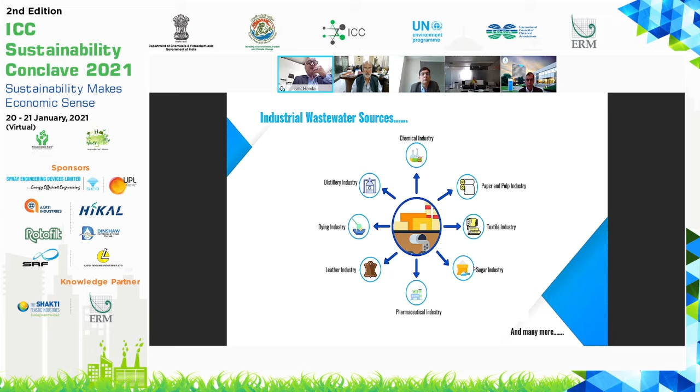There are many sources of industrial wastewater: distillery, chemical, paper, textile, sugar. They are the water guzzlers, they consume a lot of water and discharge a lot of water. When we are talking about such a high level of water consumption, discharging this water to water bodies is not good. We need to make it happen back to the industry, to make sure the industry reuses the water, because by the grace of God, water is the only element for us which can be used and reused infinite times. So we have to use and reuse water and let our water bodies become a natural source of water.

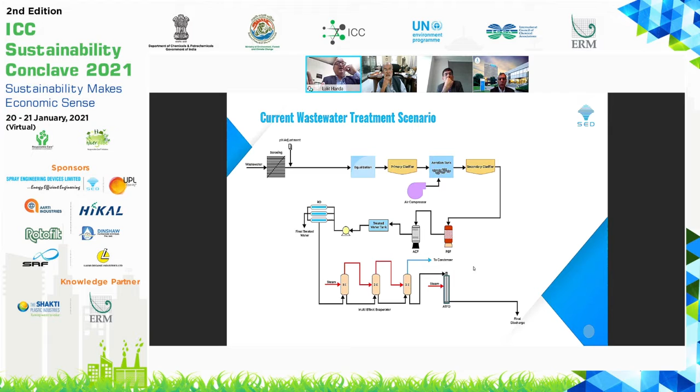We are talking about low temperature evaporation. Water is continuously evaporating from the earth—this is the first process that existed when the earth was formed. Water was continuously evaporating, and water boils at 100 degrees, but there is no evaporation happening at 100 degrees from the earth naturally. The maximum temperature on earth is around 50 degrees, so the maximum natural evaporation temperature is 50 degrees, whereas water boils at 100 degrees.

So we thought about this natural process already available to us—why not try to evaporate water at 60 degrees? Going into the chemistry and thermodynamics, we noted that water which boils at 100 degrees at atmospheric pressure can evaporate at 20 kPa of vacuum at 60 degrees. So we evolved a quite energy-efficient process to evaporate water at 60 degrees, so that energy consumption can be controlled.

In the next slides you can see there is no need for a heat source continuously running the process.

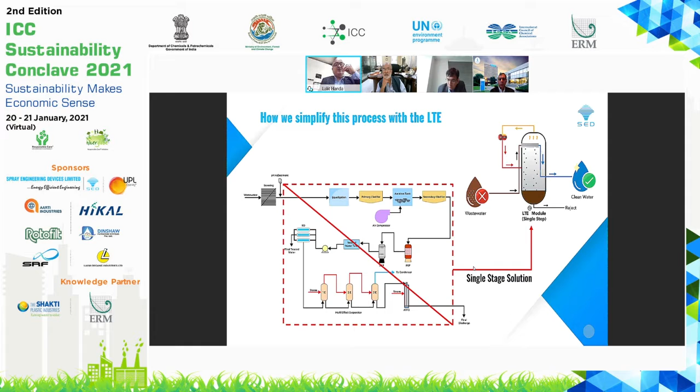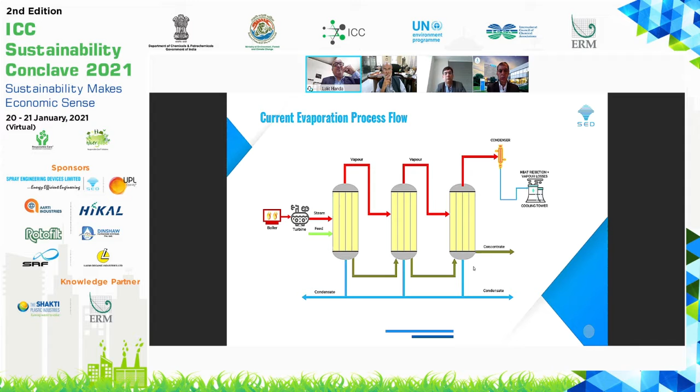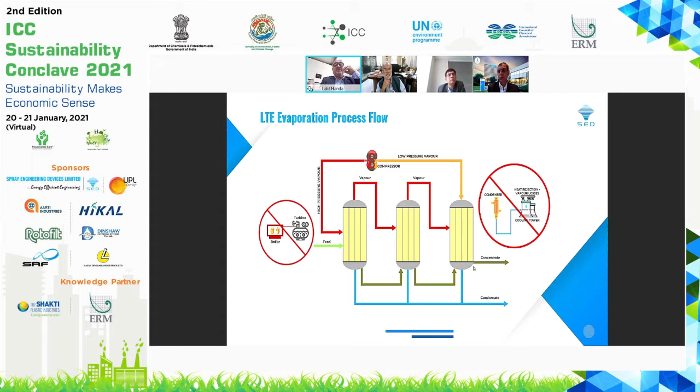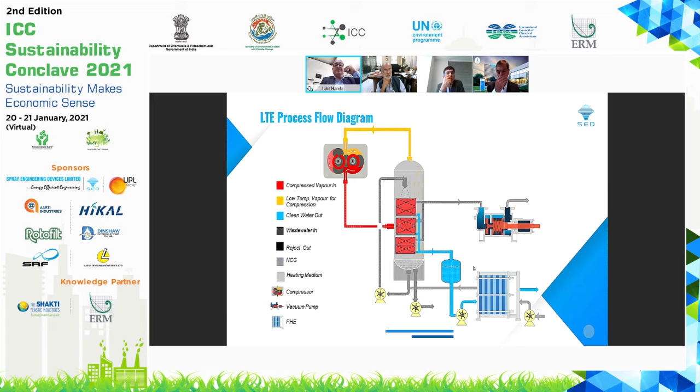This also improves the plant, machinery, and the whole pipeline, since we are no longer using fresh water—it's distillate water going back into the pipelines of the industry or factory. This improves the life cycle of the equipment that consumes water to process their end products.

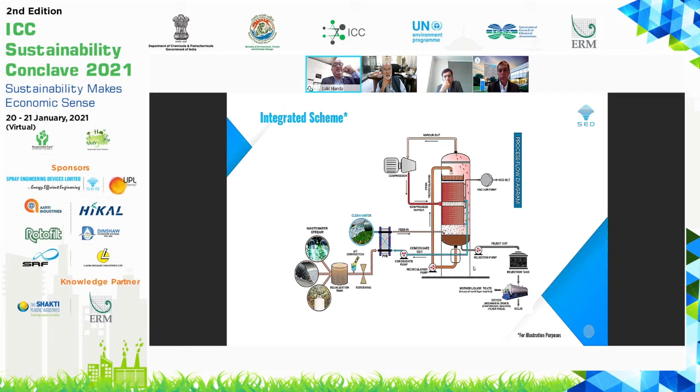It is a fully automatic intelligent machine, and all machines are fully controlled from the back end from our control room. We control and optimize the process as per the requirement at the customer place. So this is purely an automatic intelligent machine.

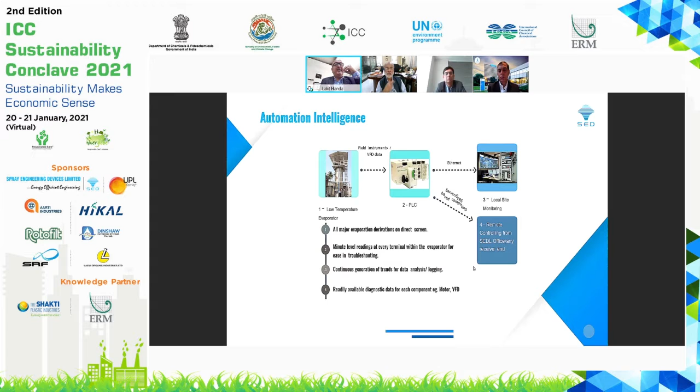It is an extremely efficient vapor recompression technology that is used, wherein the delta T for the heat exchange starts from 1 degree and generally ends at around 6 to 7 degrees. So you can understand that this is a highly efficient equipment which gives a good output from the energy point of view.

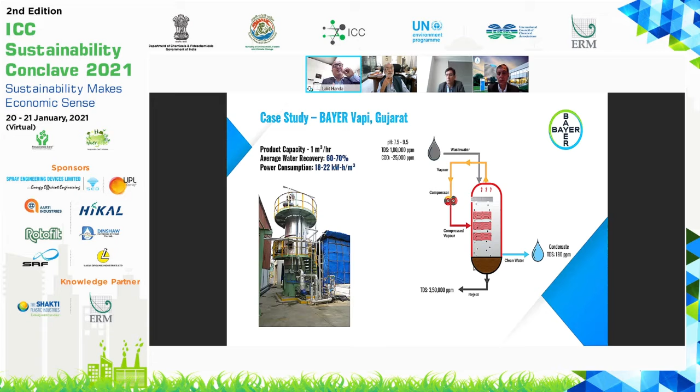Another case is in Vapi, at Supreet Chemicals. This is again a dye-stuff manufacturer where the water recovery is around 80%, and this water is being consumed by them for their cooling water requirements. And this plant has been running continuously for more than a year now.

So you can see the TDS of around 152,000 ppm coming out as 120 ppm. So it is a single stroke. There is no chemical, there is no in-built process, it's directly an evaporation process to evaporate the water and take the distillate out.

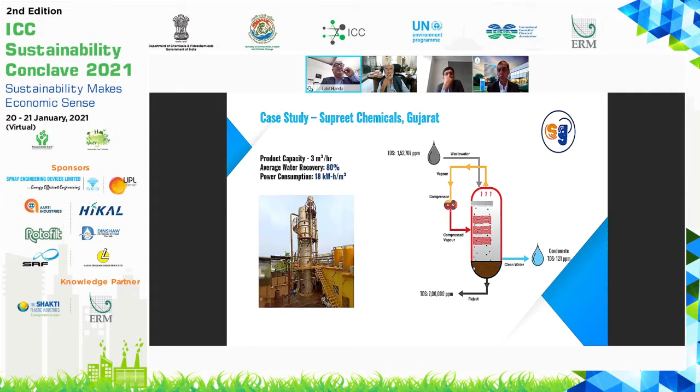This is the most chronic problem of the world, the distilleries. Distilleries discharge a lot of spent wash, and we have supplied equipment of around 300 cubic meters, which is already commissioned in Kenya, and they are able to continuously pass their daily production of around 220 cubic meters of spent wash through this evaporator, and they are not passing it to the lagoons.

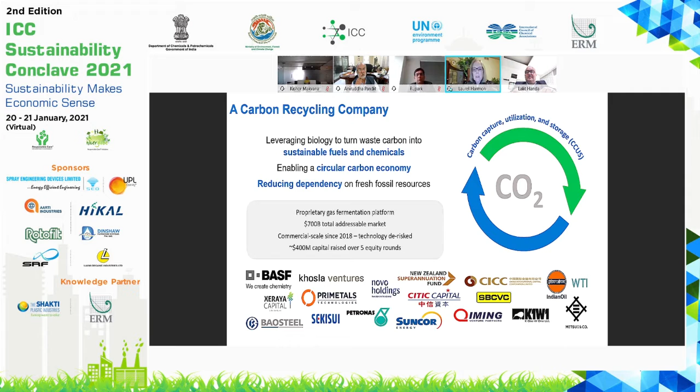As a company, in thinking about sustainability and our goals, we look to biology as the best way to harness carbon, to access carbon wherever it may arise. Biological systems can do things that we cannot emulate in man-made technologies or chemistries. A couple of really important things we, in a way, take for granted: one is the ability to replicate themselves. In effect, you've got a machine, a substance, a catalyst that's continually reproducing for you, as opposed to needing to be manufactured. And they are programmable.

Now we turn to biology that is ancient. The earliest forms of life actually originated in an atmosphere that was highly reduced, very rich in carbon monoxide, carbon dioxide, as well as other gases like methane and hydrogen.

Coincidentally, that's also the type of atmosphere produced from industrial processes today in the form of emissions. So when the company was founded in 2005, it set out to look for those life forms, those organisms that originated in that ancient atmosphere long before oxygen showed up on Earth, and to harness their metabolic pathways as chemical manufacturing systems.

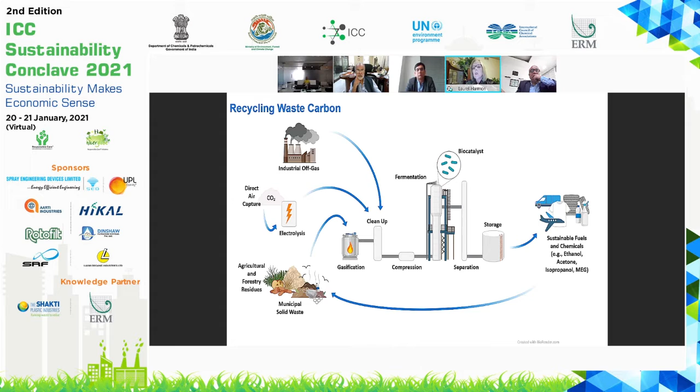And then to close the loop, if we think about non-recyclable materials, those which cannot be physically recycled, that have been made out of this waste carbon, because of the ability to use gasified waste, they can all be turned back into raw material for this process. So in that way, it's fully closing that carbon cycle.

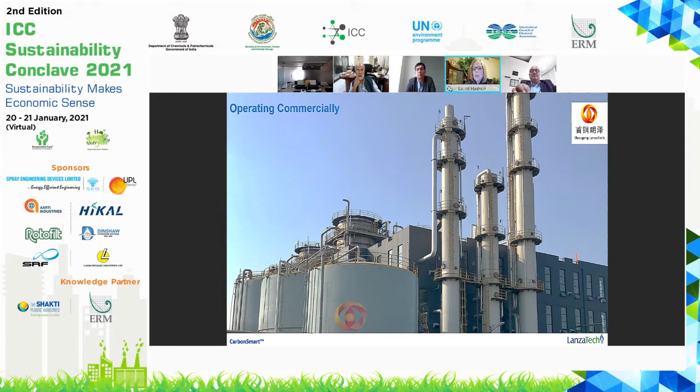So this is not science fiction. Our first commercial plant is operating in China at commercial scale. To date, it's produced over 20 million gallons of ethanol, which is our first commercial product.

And this is being produced from the off-gases of steel manufacturing. So this plant you're looking at is sitting right at a steel mill, being fed steel mill off-gas, going through that gas fermentation process and producing ethanol.

And in doing so, that quantity of ethanol product is equivalent to over 100,000 tons of CO2 being prevented from emission into the atmosphere. So another way to look at a process like this is as carbon capture and utilization.

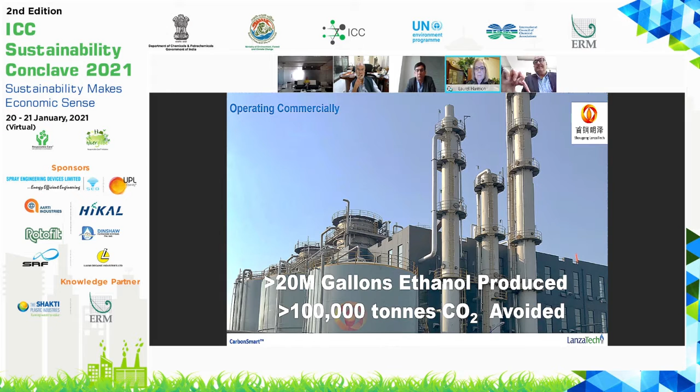Another strength of biology is its tremendous robustness. And for those who are more familiar with thermocatalytic systems, you'll appreciate how different biology can be.

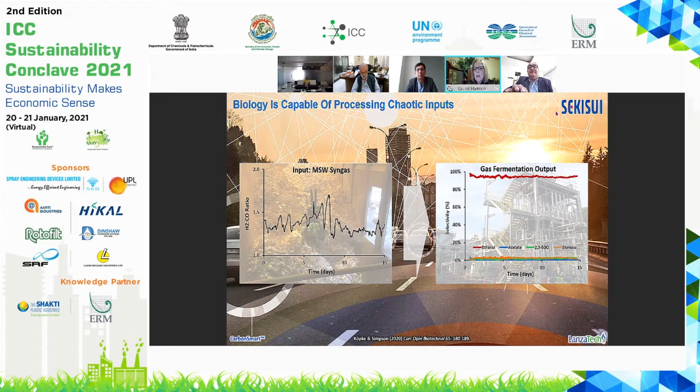What you see here is the operation of gas fermentation during that period. What's happening is that because we're using the intrinsic metabolic pathways within the organism, it adapts in the same way that our organisms ourselves adapt as we vary our diets. And so it is very robust to fluctuations and to contaminants as well.

And that is a real world example, and it comes from the system that you see here, in which we have been operating since 2014 this fermentation system, the same as is implemented at the steel mill, but in this case operating on syngas produced from unsorted, unrecyclable municipal waste. This is a pilot facility in Japan that is now being scaled up.

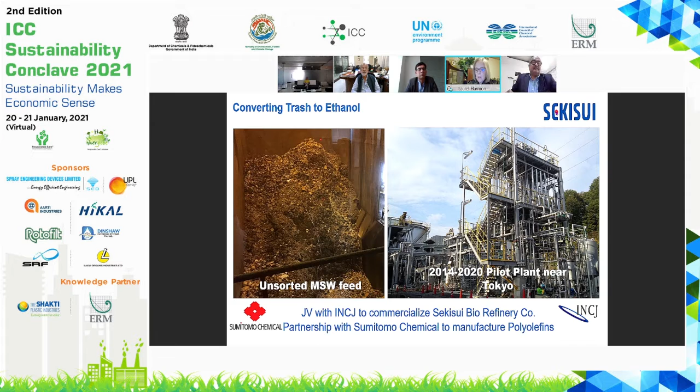The technology is being built out around the world. In India, it is being implemented for the very first time on refinery off-gases by Indian Oil at the Panipat refinery. A very recent project will use agricultural waste as a feedstock with gasification provided by Ankur, an Indian gasification company, for MRPL.

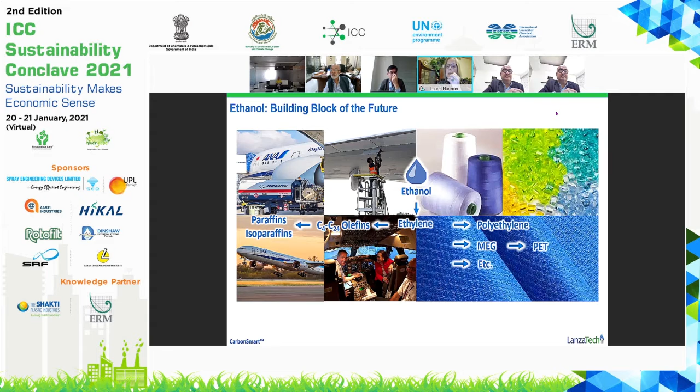So those are direct uses of ethanol, as a solvent and as a chemical. Now we can talk about derivatives of ethanol, what we call CarbonSmart products: chemicals from waste carbon incorporated into other types of goods. Ethanol is a building block, and the easiest entry point is through dehydration to ethylene, giving access to the entire value chain in the chemical or petrochemical industry. One avenue is oligomerization to olefins, which we have focused on for production of jet fuel. However, through other chemical transformations, we get polymerization to polyethylene, production of MEG, and I'll talk about some of these applications as well. So ethanol is a building block itself.

I won't say much more about the aviation application, except that we have flown commercial flights using jet fuel produced from ethanol. We have launched a new company, LanzaJet, whose sole purpose is to commercialize that technology, and the first production facility will start up in 2022.

We recently announced publicly the production of the first plastic bottle, polyethylene, made from steel mill emissions. This is polyethylene made from ethanol that came from steel mill emissions produced in China, a collaboration with Total and L'Oreal.

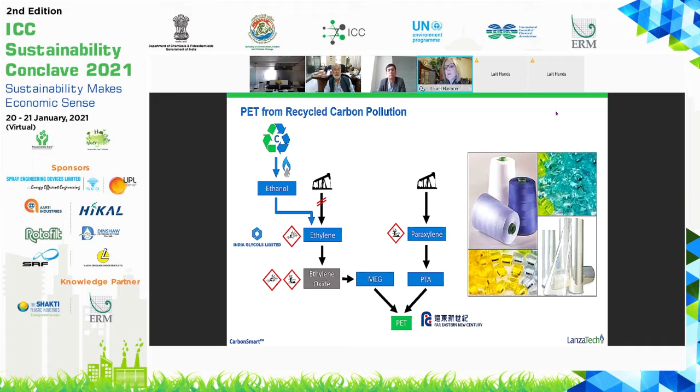An application closer to home, familiar to one of your session chairs, is the use of ethanol as a substitute for petrochemical ethylene. We have collaborated with India Glycols, who has for a long time produced sustainable MEG from ethanol. We provided ethanol from the steel mill plant in China, which was converted to MEG at the India Glycols facility. The MEG was then transported to Far Eastern New Century in Taiwan to be used as an input to PET, which will go to customers interested in recycled carbon for applications such as textiles and other materials.

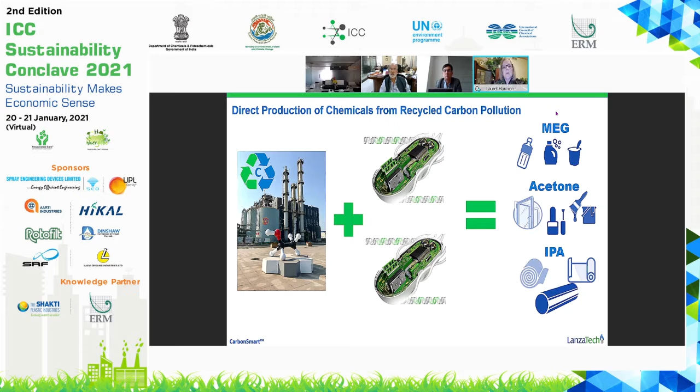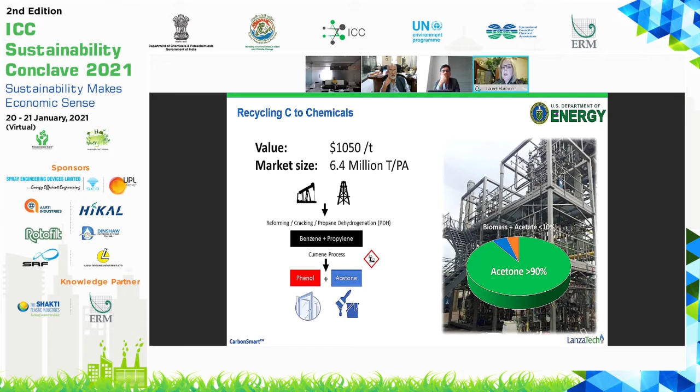Because we have developed the ability to tailor the metabolic pathways in our organism through synthetic biology, we can now tune and produce a variety of direct fermentation products without requiring downstream conversion. One example is acetone, typically produced as a byproduct of phenol production using the cumene process, which has its own environmental drawbacks and is decreasing in the market overall. We have tuned the organism to produce acetone directly in our gas fermentation process, and shown that 90% of the carbon input is selectively delivered as acetone product, with the balance being biomass the organisms must produce to survive, plus a small amount of acetate. This highlights another advantage of biology: selectivity.

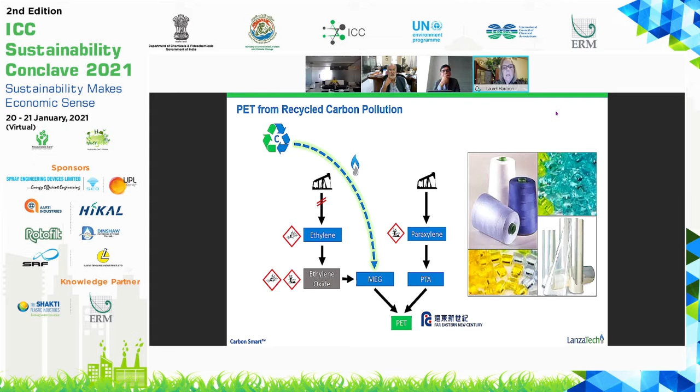We are also working on a direct route so that MEG can be produced directly as a fermentation product, without even having to go through an ethylene intermediate.

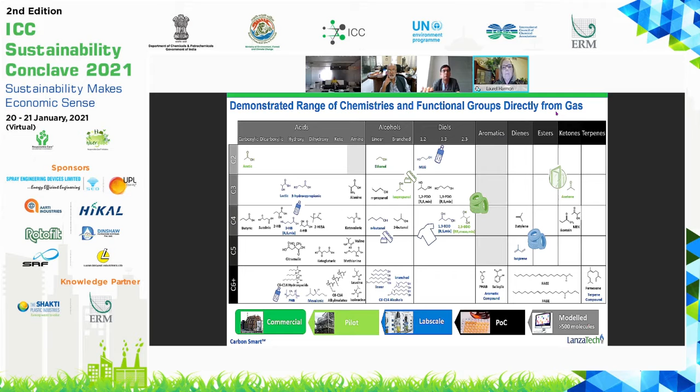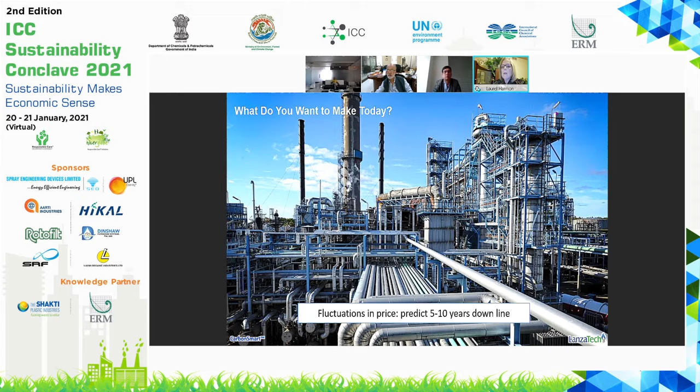So what this is doing is providing an entirely different model of chemical manufacturing, in which instead of having to predict what the market will be 5-10 years from now and provide those capital investments, we can think of the separation of the bioreactors as hardware and the microbe as software. Instead of changing all the hardware and developing a whole new capital investment, you swap out a microbe. As either the market changes or new microbes become available, this can be turned around.

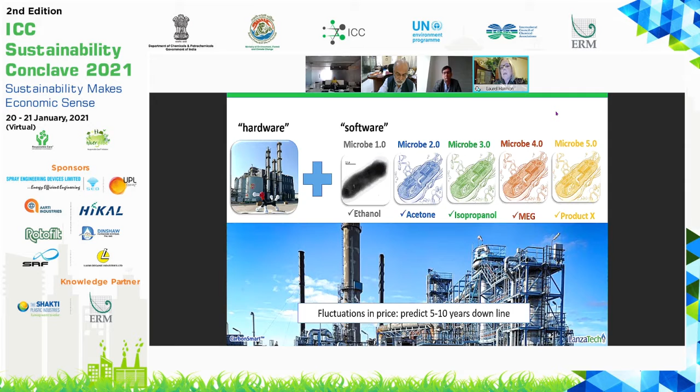And so what that really results in is a very disruptive view of manufacturing, which is no longer long predictive-type cycles associated with high capital investments, but instead becomes one in which there's rapid reaction to the market.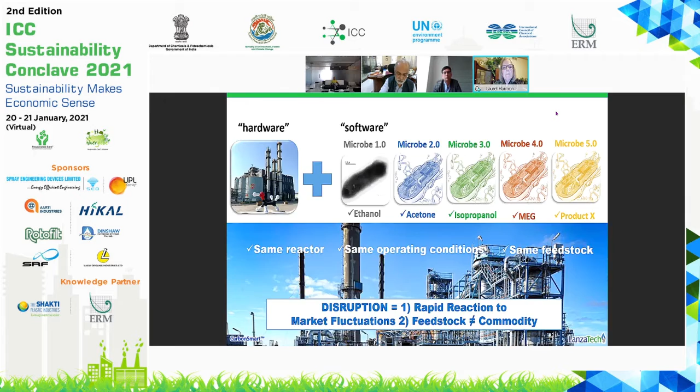So in summary, we have ethanol as a product itself, ethanol derivatives, and then all those new chemical products that are accessible. As a consequence, we are really closing that carbon cycle and creating the basis for a circular carbon economy. Thank you very much. I hope I've given you a taste, and I look forward to the remaining presentations.

Thank you, Dr. Harmon, for an outstanding presentation. It is indeed the fact that we can learn many things from nature. Nature is the most efficient optimizer of resources, and there are many processes we can learn from it. The only thing is, nature has all the time in the world - unfortunately, we don't. So how do we speed up the activities performed by nature for engineering scale application? I'm really impressed with this approach of synthetic biology put to use for industrial chemical manufacturing using most of the waste carbon. Thank you very much, and I will take up some questions later during the QA session.

Let's move on to the third speaker of the day, Mr. Kishore Makwana from Rotofilt Engineers Private Limited. As far as Mr. Makwana's expertise goes, in addition to being associated with ICC, he has also been associated with TechMac engineering firms and specializing in handling of solid liquid equipment.

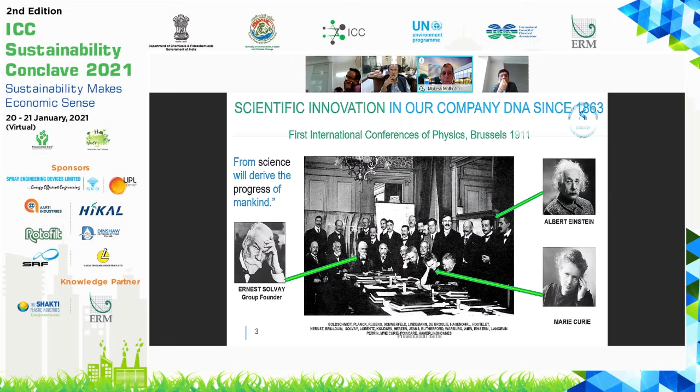We exist to connect people to people, ideas from different resources, and join our chemical elements to reinvent progress. Our vision is to create sustainable shared value for all. By 'all' we mean everybody in the community who has a stake — value that goes beyond ourselves, our stakeholders and customers, to the community at large.

Today, Solvay is a materials and science company. We have plants across 64 countries with more than 24,000 employees, and today we boast more than 53% of our sales coming from sustainable solutions.

We talked about sustainability driving innovation, and sustainability requirements come from business trends that drive our strategy. Look at the major trends: electrification, to reduce reliance on fossil fuels — it's predicted 50% of new cars produced by 2030 would be electric. Air travel needs light-weighting to save fuel. Digitization also needs energy. All these are basically screaming for sustainable solutions, because using energy, one of the biggest emitters of carbon dioxide, is going to become very, very difficult.

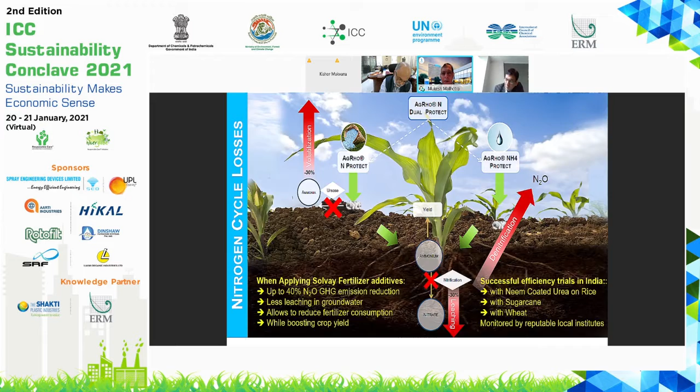Similarly, on the phosphine side, when we talk about post-harvest crop protection, even today while shipping, people use methyl bromide for fumigation, which is basically an ozone-depleting product. We are one of the two companies in the world which came up with a cylinderized phosphine gas for the same application, which has no residues, no traces, and no risks.

Three more I want to talk about. One, I think, attracted a lot of attention during the current pandemic scenario: ActiZone. This technology not only cleans better, but continues to work for 24 hours. It forms a layer on the surface, and even when it becomes dry, it continues to fight germs, cleaning 99.9% of germs for up to 24 hours. So imagine using this in public spaces, hospitals, buses - you can be assured of germ-free seats to sit on.

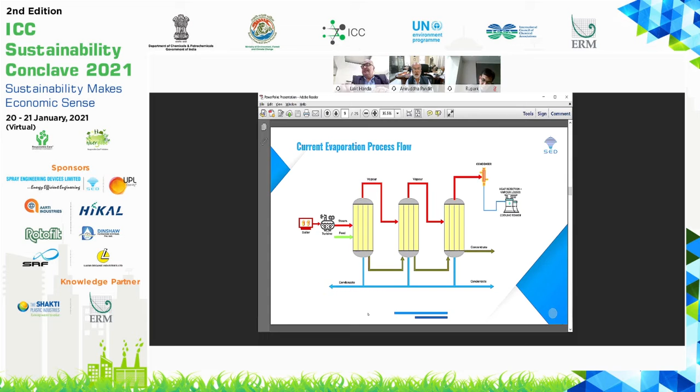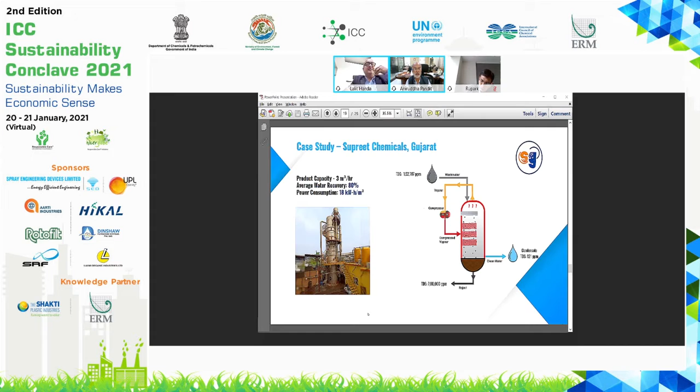I'll share that, please go ahead and share it. Go to the slide where he got disconnected. I think the second case study, of the industrial case study. It was second, go ahead please. Yeah, this is where it stopped. I go to the third one, I think. Next, yeah, this is where we stopped.

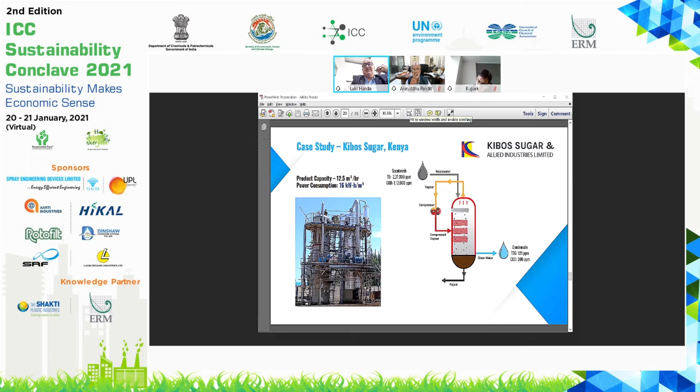Correct. So this is the case study about a distillery where we have handled the spent wash of around 300 cubic meters per day, with total solids of around 23%, and the condensate cut is around 120 to 200 TDS. The reject is a concentrate which is organic in nature and is being handled separately. So this is about the Kenyan case study from the distillery point of view.

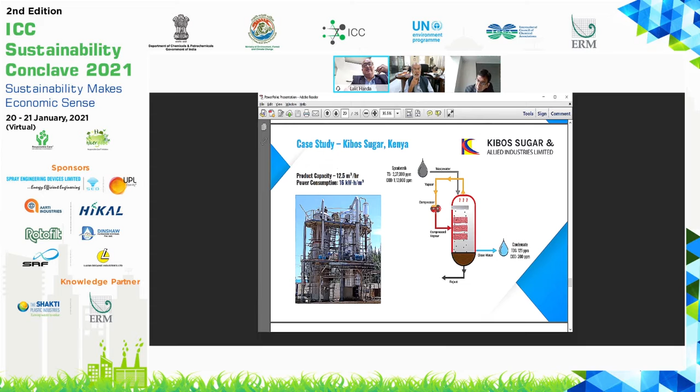Please go ahead. Next, please.

So wherever there is water, we have a solution for the industry, and this is a completely sustainable solution. In this solution, there is no chemical, no heat source required, and it is the best solution for the industry to adopt for sustainability, sir.

Please go ahead, sir. So we have a lot of installations across the country, and one we have in Kenya is in a distillery. So we have quite a substantial reference across the country to showcase our strength and equipment, as well as the sustainable technology, to our prospective partners.

Please go ahead. We were awarded as a niche company by the CII Triveni Water Institute for excellence in water management, for which they did a complete validation of the process for almost 7 months before we were awarded in 2019, sir.

Please go ahead. We have an office in Chandigarh, and our manufacturing facilities are in Baddi. We have 3 factories in Baddi to produce our equipment for supply to the country as well as across the globe. Please go ahead, sir.

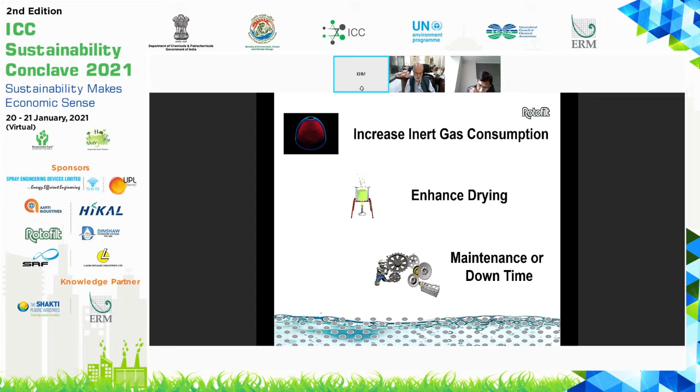Sometimes we use inert gas as well as air, so there's an increase in consumption of air. Then ultimately, when you take it out as a mechanical separator, the product has got moisture, which enhances drying cost. And maintenance, it's a downtime, with a lot of manpower involvement. So the immediate question that comes to mind is how to sustain or improve the environment.

Rotofilt is 100% focused on solid liquid separation technology.

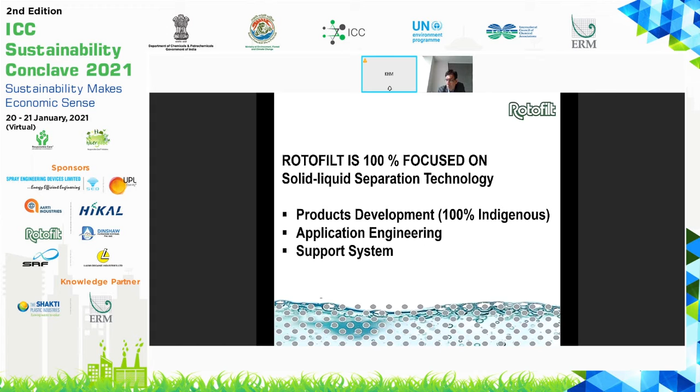Product development is our prime criteria, and all our products are 100% indigenously designed and developed. Second, we have started application engineering, because any chemical industry needs an input condition and an output condition. If we provide a box in between which serves their purpose, that works out. So we started application engineering. Then the support system, because for any capital equipment, lifetime support is very important. That is what we have started, and we are working on it.

If we take it as a Rotofilt journey, we started first with pusher centrifuge, then we did decanters, then we did peeler, vertical basket. We got an R&D approval by DSIR. Then we did automatic vertical pressure filter, inverting filter centrifuge, as well as R&D. Now we are working with DSIR to have R&D at site, because anything you do in-house is not tested at the site, it has got no value.

Today, I am taking the automatic vertical pressure filter as a product, its journey, operations, and then case studies of it.

Pusher centrifuges, we started in 2002, and the project was funded by Gujarat Venture Finance Limited. Then we did decanters in 2004. Then we did peeler centrifuges, because some of our known customers wanted equipment which is conventional. So we derived and designed that.

Then we did vertical basket. Mainly we are doing bottom discharge. It is all semi-continuous products. Then AVPF in 2009. This project was funded by the Technology Development Board, Ministry of Science and Technology.

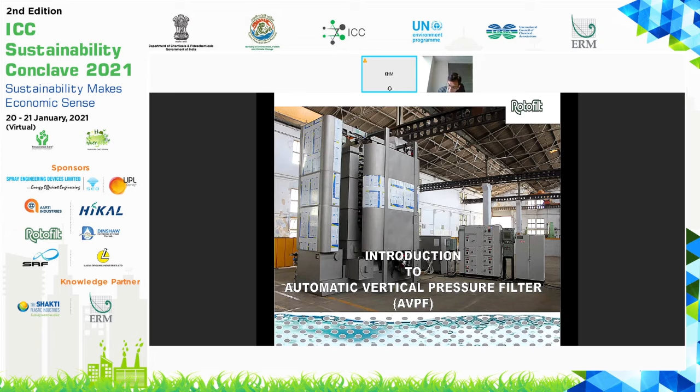Operations of automatic vertical pressure filter. Any equipment has got operations, how it operates. First is feeding, second is pre-squeezing, third is cake washing, fourth is final squeezing, then air blowing, and next is cake discharge.

This is the first step, feeding, because there are individual chambers on the line. When feeding takes place, filtration is taking place, in a controlled chamber. It is 50 millimeter to 60 millimeter, depending upon the model as well as the product. That is the way we work out and operate.

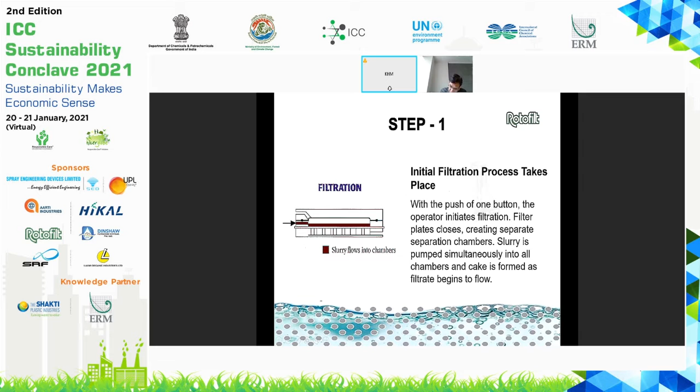Then pre-squeezing, there is a membrane in between, or we can call it a diaphragm, with water being non-compressive. So consumption of power is reduced on the line because of that. Ultimately, delta P across the cake matters. Pre-squeezing is done where the product is to be washed. When the product is not to be washed, it goes to final squeeze.

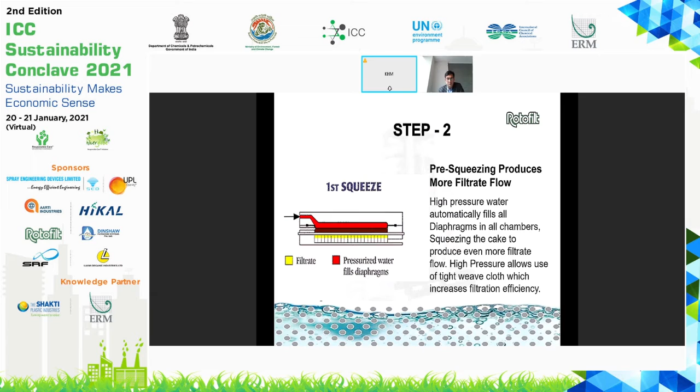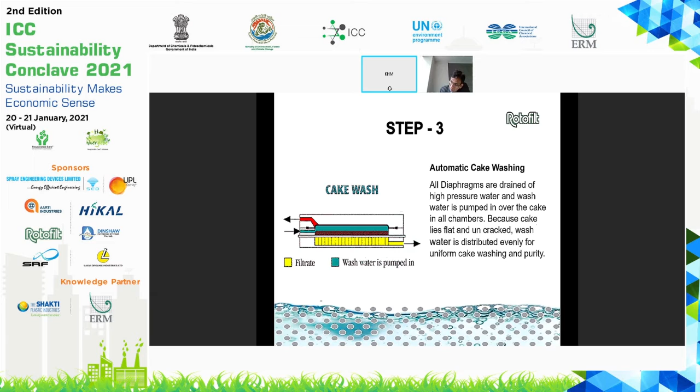Then, if the product is to be washed, whatever wash liquid is required, accordingly it is washed. It will be a displacement wash. So the consumption of wash liquid reduces a lot compared to any other type of filtration equipment.

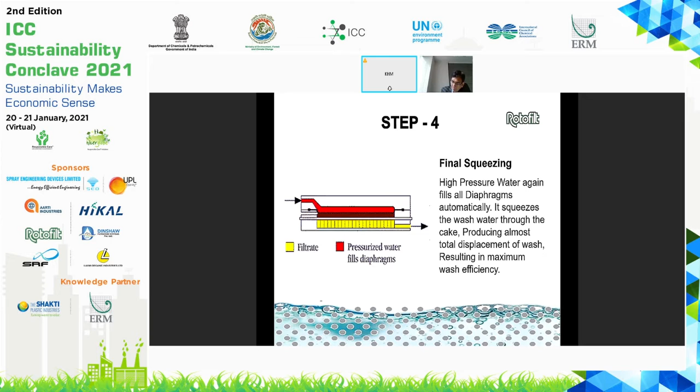Then final squeezing. Final squeezing is done with 16 bar. Delta P across the cake of 16 bar can be generated in this equipment, whereas with any other equipment, centrifuges or vacuum, delta P is hardly about 1 bar. This is 16 bar.

Then further, if you want to dry, we can blow air. Sometimes people use, if the product is not compatible with air, nitrogen, or it can be done with a little hot air also. So it can be further dried.

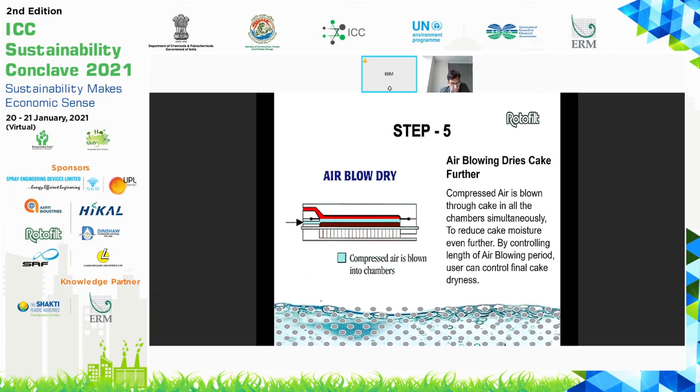Then it opens up. Each individual filter plate is opened up and the cake is discharged. If somebody would like to see the operations working on these equipments, we have already put it up in an exhibition. There is a video on that. One can go through it and see it.

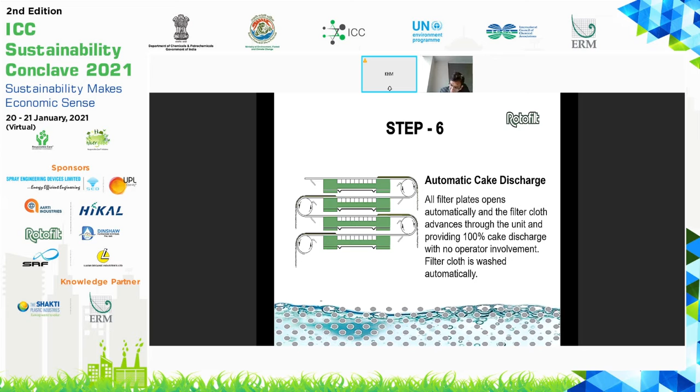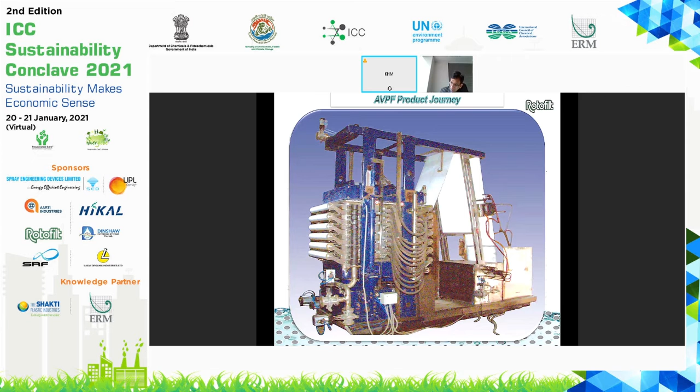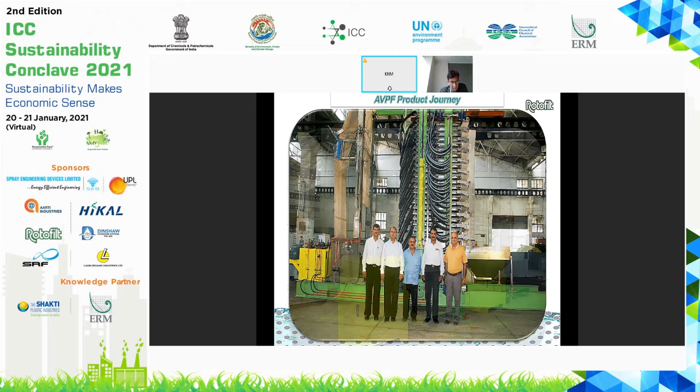Then we further developed to this. Then we further modified it to cater to the pharma industry, for CGMP construction.

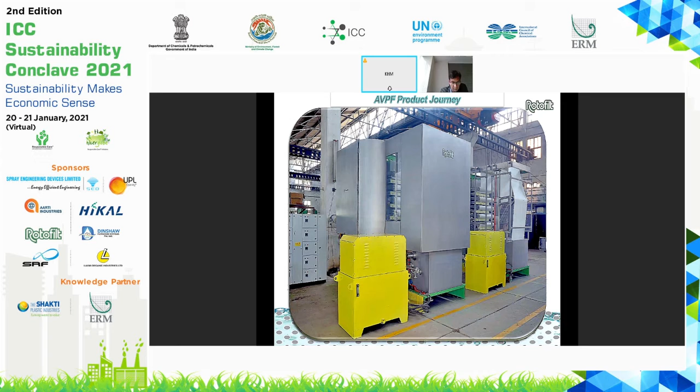This was developed for pigment industries, to make it suitable for them. Then we did a totally enclosed equipment where the product is sensitive to the environment. This has been done for one particular case.

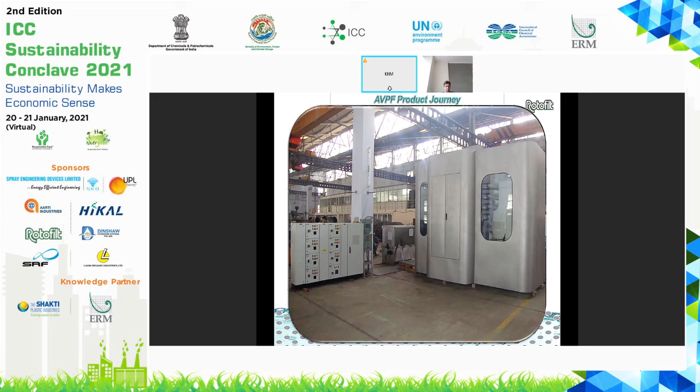This equipment was derived for solvent applications. This is further development, because we have taken a pictorial journey of how we have moved. So seeing is believing.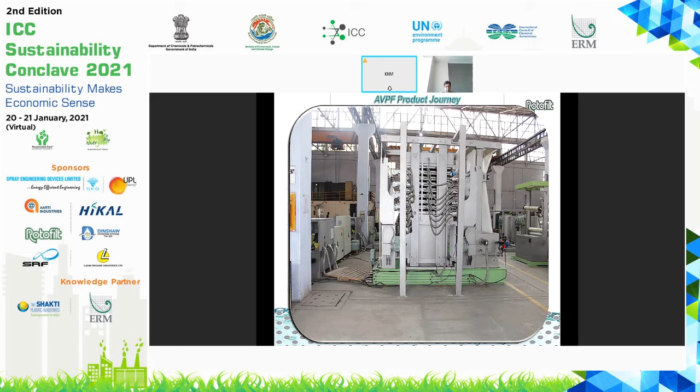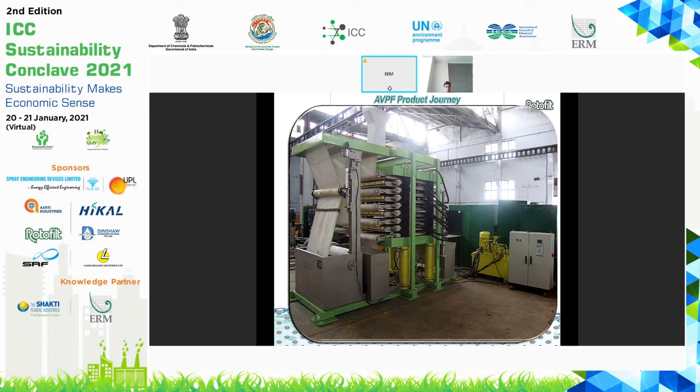This is 100% PP, contact parts developed for exotic material. This is now the new generation.

This is as on today. This is the development, gradually we have done it, because depending on demand we have exported the machine also. It is CE marked, ATEX approved. These are the things.

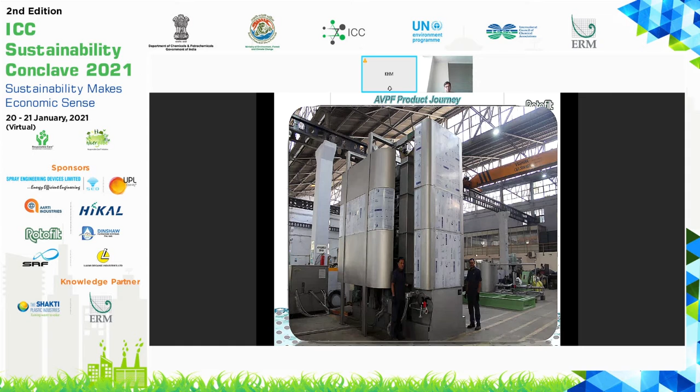I'll take you to our production line. This is our production line for centrifuges. Assembly shop, you can say that.

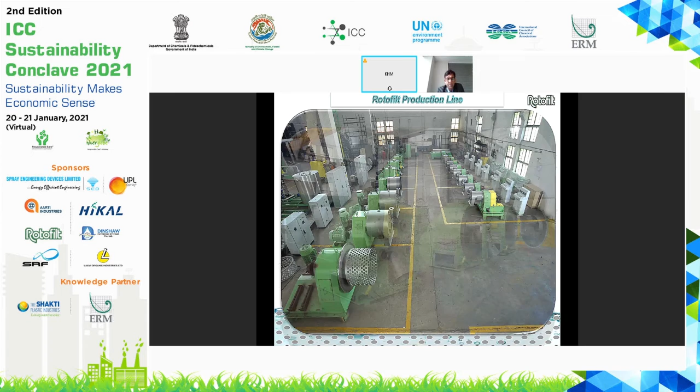This is for peeler. I think the picture is not clear, it has not come. Anyway, this is a bottom discharge, 1600 dia. This is first time developed and designed by us in India.

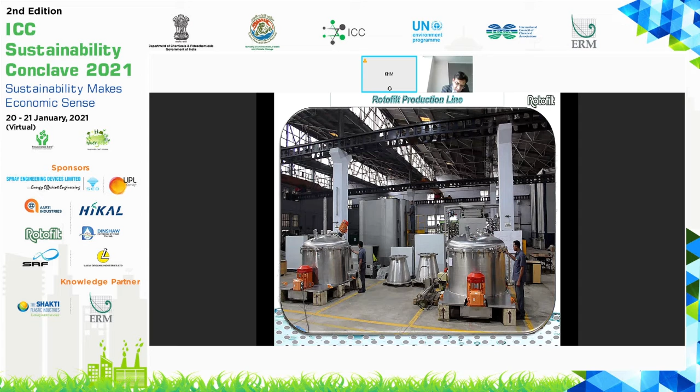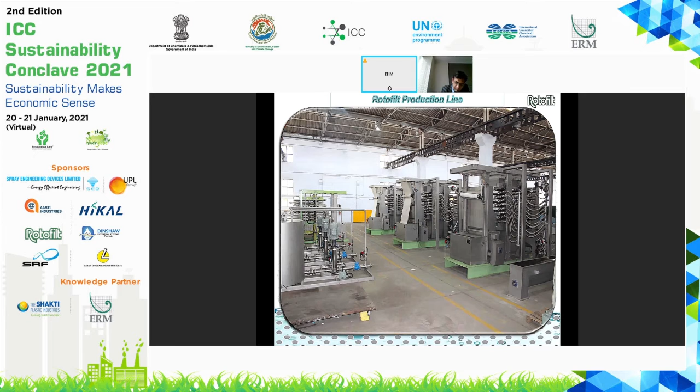This is the cake discharge video we have taken. Hope the video will work out, because these are different products where the cake is getting discharged. We have taken this up as a small clip.

Is it possible to click on an AVPF cake discharge video? If it has been shared, it can be played. Maybe one or two videos can be shared rather than going through all of them, just to explain the principle of operation, which is already shown in our exhibition booth. If anybody wants to go into the exhibition, there is a booth with videos kept there. So the videos are already there. Actually, we are unable to run the videos here, the links have been disabled on this presentation. So participants can visit the Rotofilt booth in the exhibition tab below, and from there you can view all the videos and projects. Anybody who would like to see more can contact us, and we can definitely share with them.

The speaker has already mentioned that the business model should change with the time. This is the business model we have developed for solid-liquid separation. We interact with the end users, and the mechanism is provided by us. We understand what processing is to be done, and we get this information.

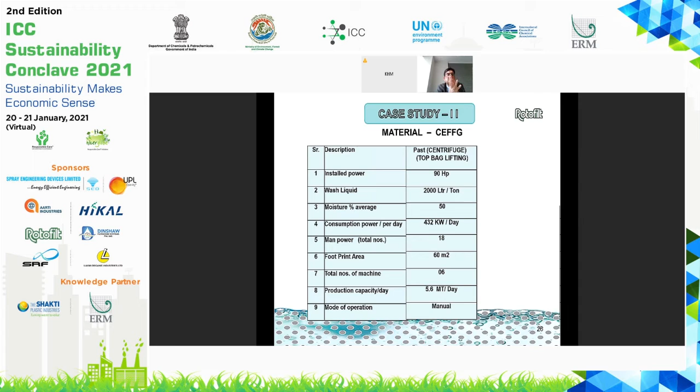This is one of the pharma intermediates, API you can say. Earlier it was 90 horsepower, now it is 25. Wash liquid was 2000 liters per ton, now it is 50% of that. Moisture was 50%, now 35%. Power consumption, you can see the difference. Production capacity is more or less the same as what they were looking for. Though it was manual earlier, now it is 100% automatic.

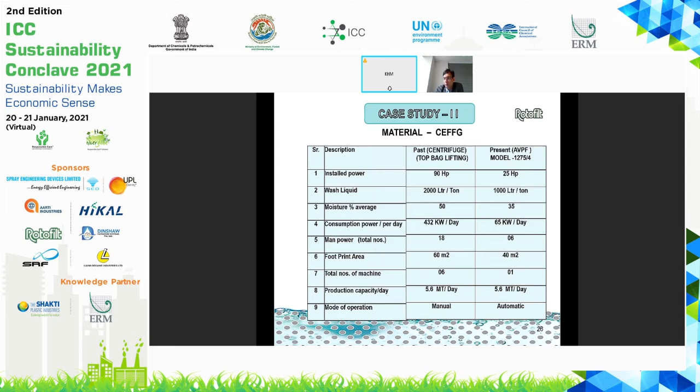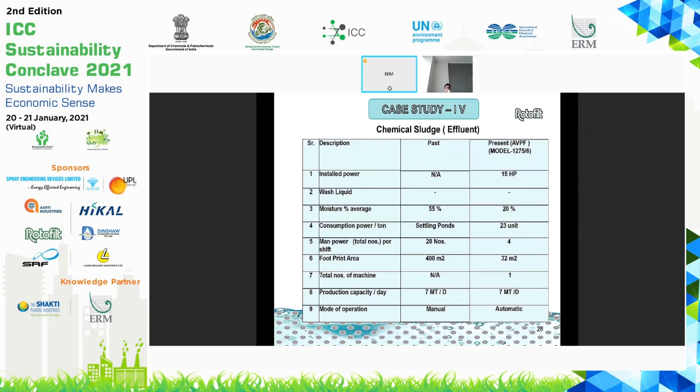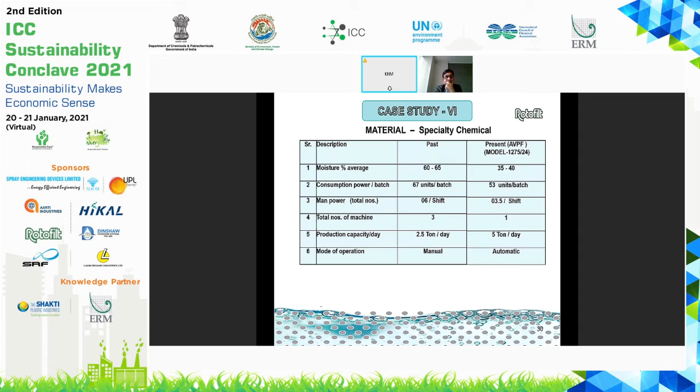These are different case studies. This is already there, I think next. Everywhere you can see the benefits conclusively. Because we are, from 2002 onwards, a 2002 company, today we have got a global presence with local support. That is the thing. Next.